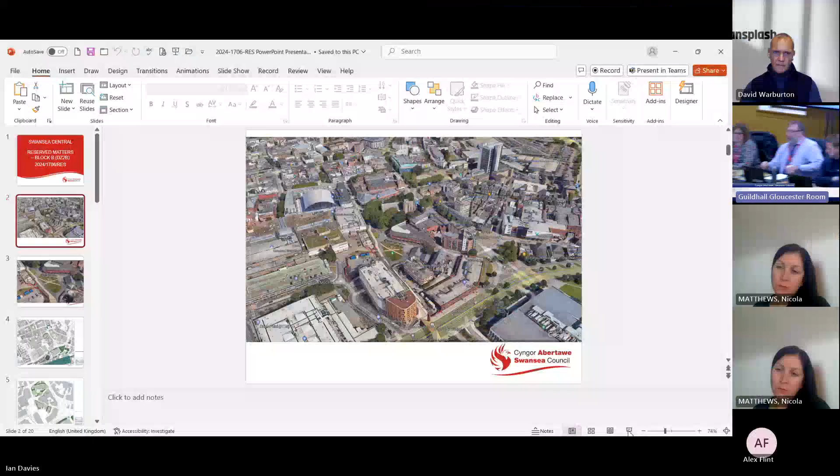Thank you, Chair. Afternoon, members. This is a Reserve Matters application relating to Swansea Central Block B, plot DZ2B as it was originally referred to, comprising a mixed-use building, commercial units with offices, and various public realm improvements, and approval of details pursuant to the outline planning conditions.

The Reserve Matters application was submitted on behalf of the Council and its joint venture partner, Urban Splash. It follows on from the Section 73 permission brought to committee in June, where we changed the parameters relating to the land use for Block B from residential to offices, and also changed the maximum height parameter from 22 metres to 32 metres.

So obviously that's allowed the Reserve Matters to be submitted in accordance with the outline parameters. Essentially, the application seeks Reserve Matters approval for access, appearance, landscaping, layout and scale - basically ground floor commercial use with offices on the upper 4 floors. It's a 5-storey building with ground floor commercial and levels 1 to 4 for office use.

As you can see on the first slide, the application site is the grass triangular area in the middle of the site, bounded by St David's Church. You've got St Mary's Church to the top, the old part of St David's to the east, and to the west the multi-storey car park which is coming to completion. There's a residential block, the bridge to the south, and the quadrant to the west. Next slide please, Ian.

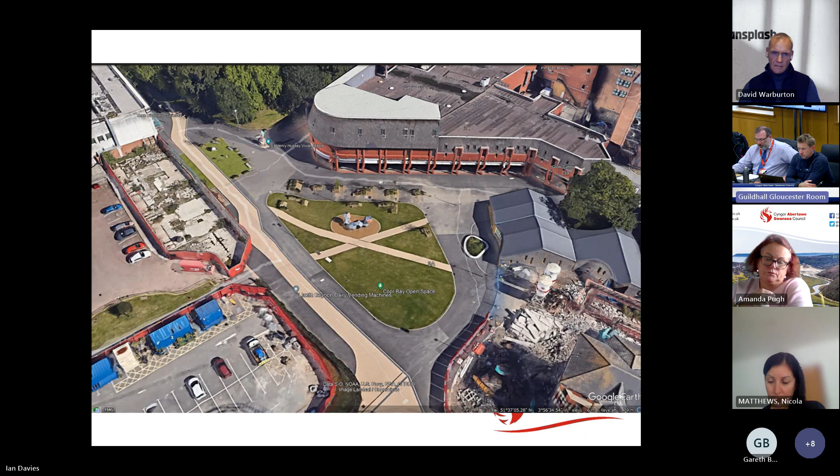So obviously, the shape of the plot is dictated by the site. If you go to the next slide, you can see the red line area and the triangular plot in the middle of it. So it's bang set central in the Swansea Central development. This is the next phase of development following on from the arena, the coastal park, the bridge, and the multi-story car park.

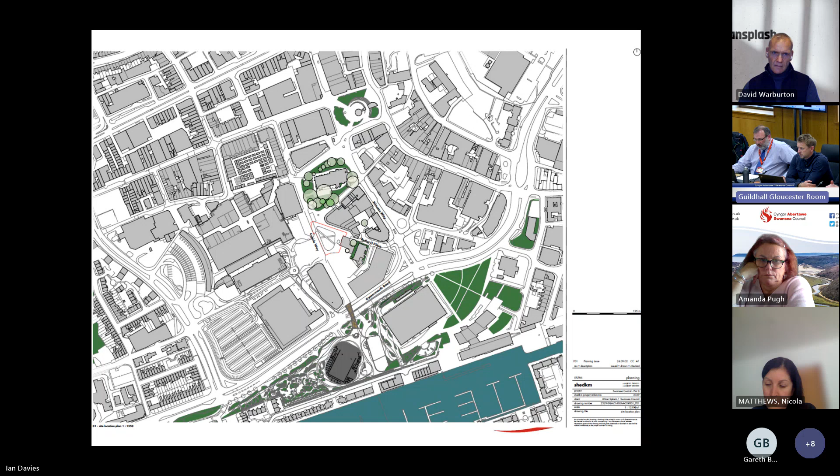So this takes you into some slightly more detail, which shows the footprint of the building. As you can see, it's a triangle block with various public realm improvements around the block.

So the building is designed with a high level of sustainability. It's designed to meet British Council for Offices BCO requirements throughout, providing space requirements to maximize efficiencies while seeking to achieve good standards of well-being, levels of daylight, sunlight, generous floor-to-ceiling heights, and multi-tenant flexibility. It will also seek to deliver an excellent BREEAM standard of accommodation, and aim to meet the London Energy Transformation Initiative, also referred to as the LETI standard for commercial offices, to help meet zero carbon targets.

The scheme has been subject to detailed plans and discussion between the plan officers, placemaking officers at the council, regen officers, council leadership, as well as the design commission, and was also subject to pre-application consultation, which is summarised within the report.

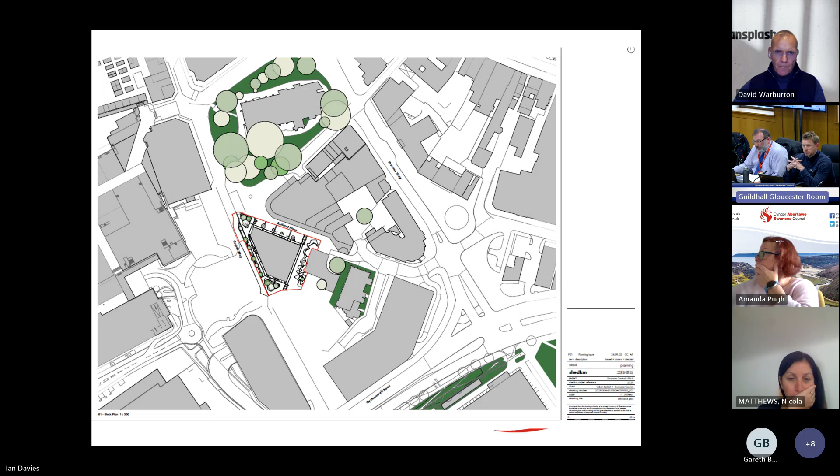As I say, for reserve matters applications, the principle of development is established, but I won't reiterate the policy position — we'll go through the design requirements. Next slide, please, Ian.

So you can see the triangle plot, this is the ground floor. The turquoise green area is basically the commercial element, potentially subdivided into 2 units. The blue area is the entrance, which is basically opposite the church hall. The orangey bit is the back of house, and the white bits are basically the plant, refuse storage, bike storage, etc.

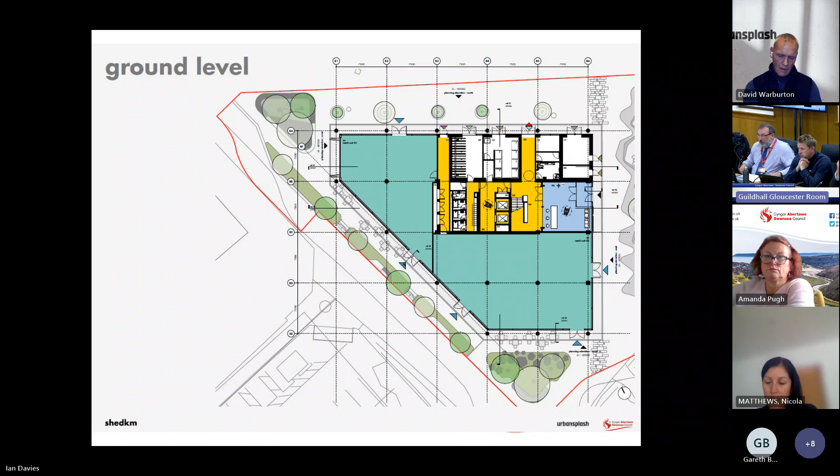So it'll be a single access point through the blue area for the offices above. The commercial units will have their own entrances, and you can see the public realm outside, which allows for, if it's for example food and drink, cafe, restaurant type uses, external seating as well.

So there you can see a potential layout. You've got 2 units there, the blue and the pink, and you can see potential tenant arrangements relating to the internal layout. It's been tested to allow for back of house requirements and seating, and you can see the outside seating as well.

Proposals have been developed in line with the outline consented master plan parameter requirements. Zone DZ2B allocates a maximum height of 32 meters, so it's been designed with a plant height of 32 meters with a parapet height of 28.65 meters. Both are in line with the consented outline master plan parameters, and the scale and footprint are also in accordance with the parameters.

So it's been designed with a proposed wedge triangular shaped building footprint due to the master plan layout effectively, and the designers responded accordingly to this development.

So it's designed to be fully accessible, to provide a flexible building suited to the needs of future tenants, with a single point of entrance up to the upper floors. You've got cycle parking on the ground floor of the building. Use of cycles as a mobility aid is acknowledged and will be accommodated. Some cycle racks will be designed to accommodate trikes, with flexible arrangements based on need, and potential for EV charging points for bikes, mobility scooters, and electrical scooters as well.

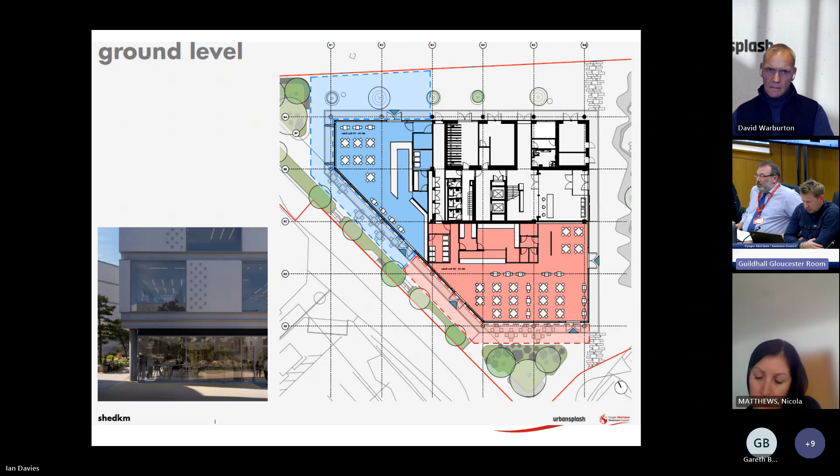Next slide, please, Ian. So that's a typical floor plan of the upper floors, 1 to 4, essentially the same. The blue area is the open plan office space, and you've got the central core area, which is the orangey color — that's the toilets and staircase etc — and that replicates itself on the 4 floors.

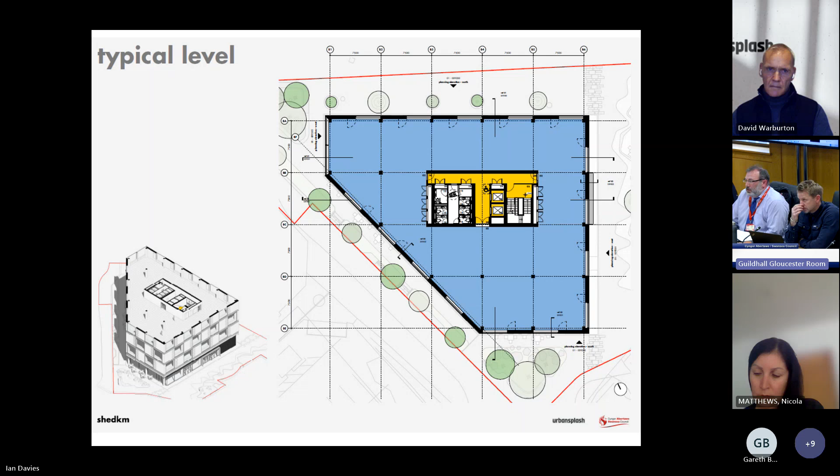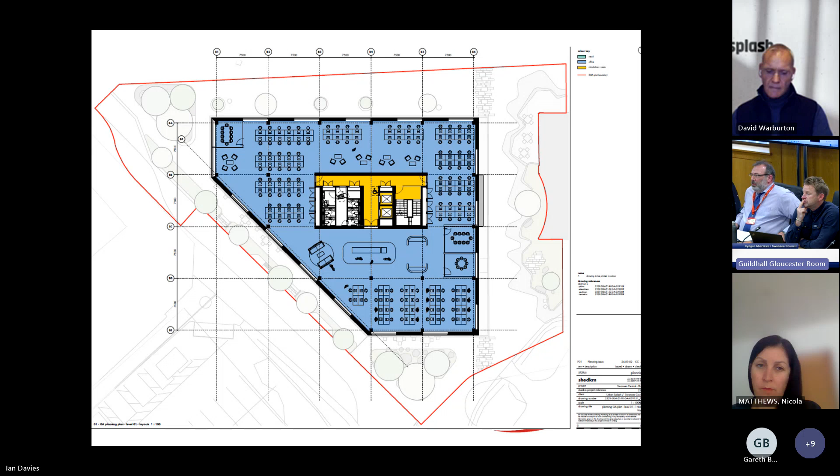So there we go, that's the plant. You can see the orangey bit is the plant. You can just see the PV in the next slide as well, please.

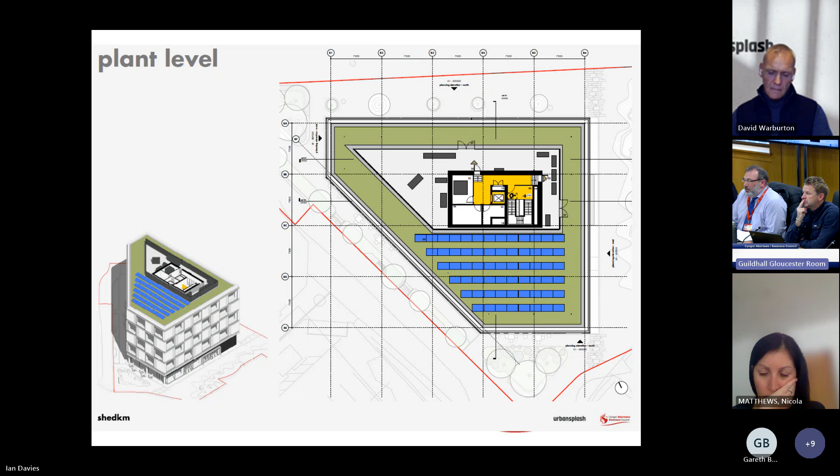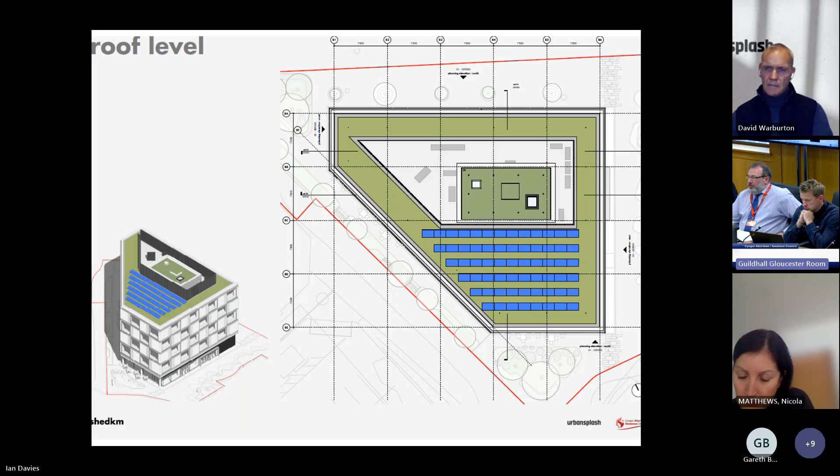So the roof level, you can see the PVs, and the green areas are the green infrastructure, blue-green arrangement, which is important for green infrastructure, meets the SAB standard, and there's a sedum roof as well. The PVs will help make the building as zero carbon as possible in terms of renewable energy.

So this starts to show the detail of the external facade. You can just about see some of the detail. You've got shop fronts at the ground floor, which would be fully glazed, and then a mix of perforated cladding panels and full glazing panels.

You'll have the slender louvered facades, which will hide mechanical ventilation behind the facade. You've got quite a pale cladding, which won't clash with the surrounding red brick and stone of the historic assets, St David's Church and St Mary's Church as well. And then you've got expansive floor to ceiling heights.

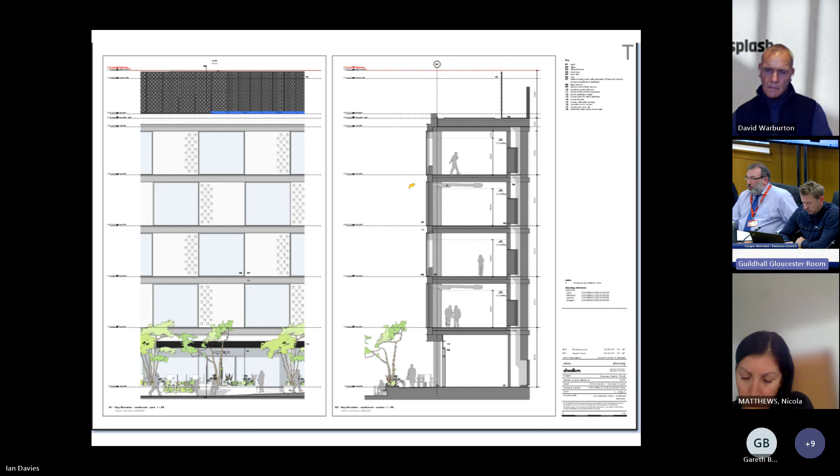So if we go on to the next slides - we've got a number of CGIs which will take you through a number of different angles to view.

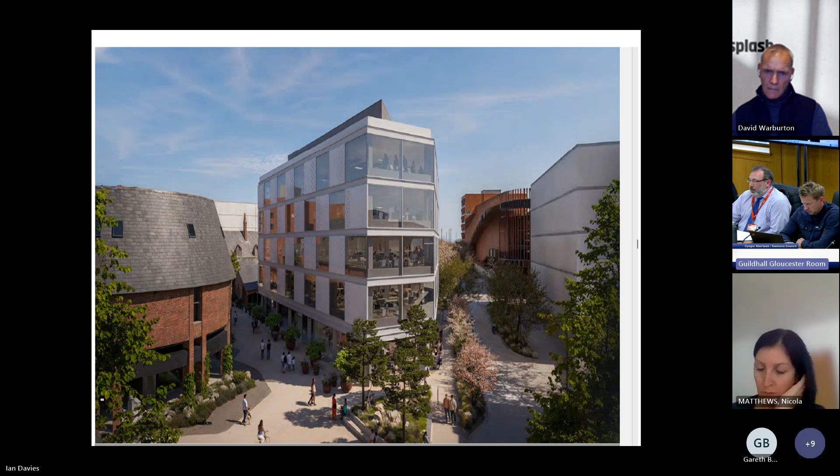This one is looking south towards the bridge. You've got the old St David's building on the left - you can just see the triangle, which gives you an idea of the triangular shape of the building. And the future development on the right, you can start to see the development on the coastal park, the green infrastructure, ground floor, lots of public realm improvements, and the idea of the perforated cladding interspaced with the glazing elements.

Next slide please. So yeah, that's from the opposite direction. That's the facade as you walk south-north from the bridge, walking from over the bridge towards St Mary's Square, St Mary's Church. You can just see the shape of the building, and get an idea of the cladding and glazing elements with the breakout space from the commercial space at ground floor.

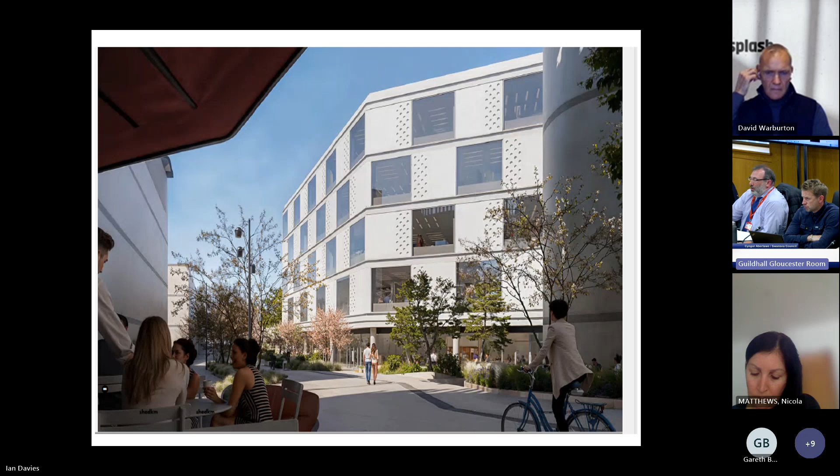Next slide please - again there's some close-ups of the ground floor, the entrances, and the building.

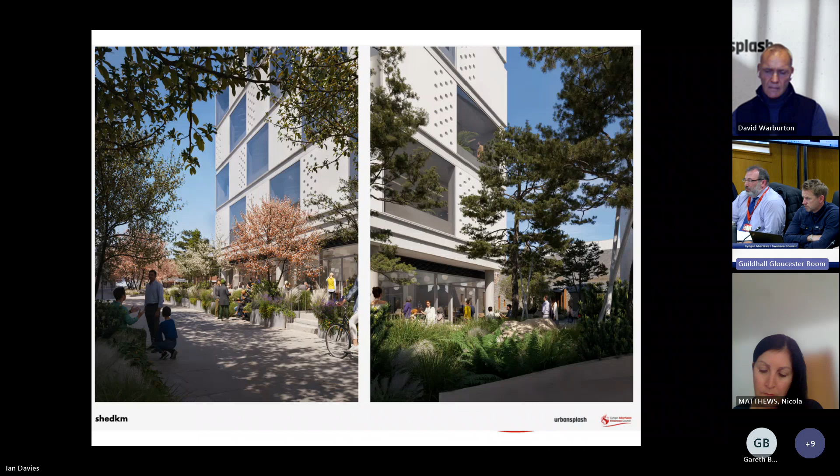Again, you've got different images from different viewpoints, so you can just see the high-quality design elements.

So that gives you a close-up of the shop front. That's the glazing element of one of the units, so it's got active frontage at ground floor, and it would suit itself to some kind of cafe, food and beverage type usage.

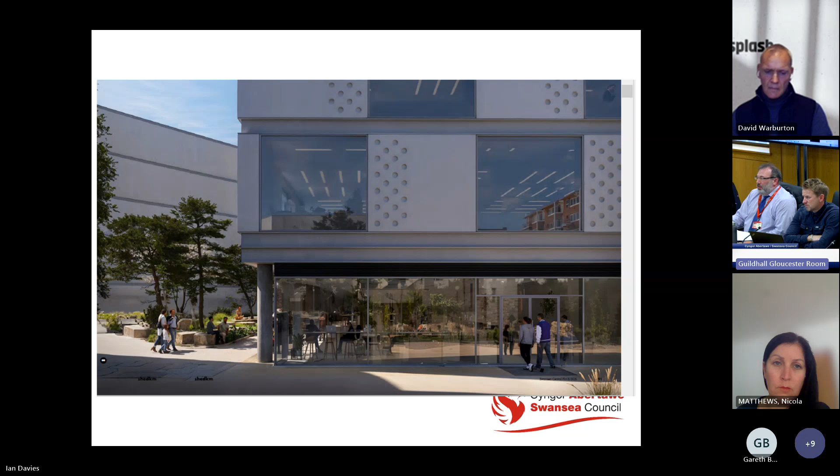Next slide please. Then it shows you from a different angle - you can just see the statue in the foreground of Henry Vivian.

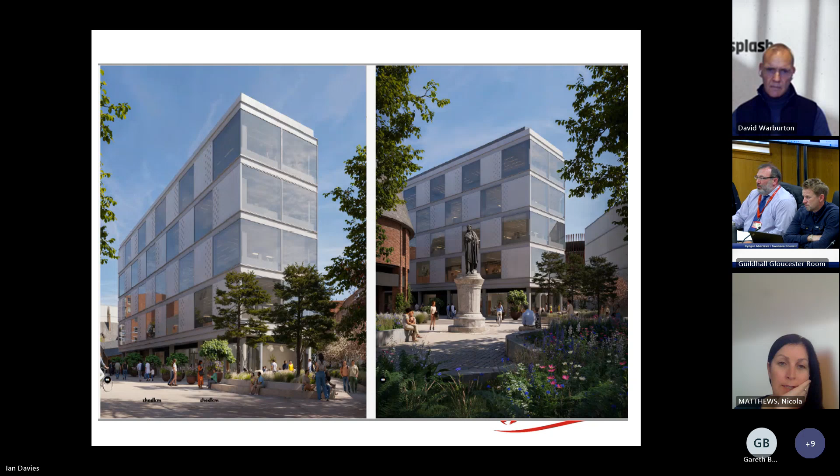I think this is the last one, so I put up the slides. This is the landscaping effectively, picking up the landscape and green infrastructure on the roof, and the extent of the green infrastructure of the public realm and its relationship to the north-south link walking from the bridge northwards up towards the quadrant and St Mary's Church. So it's the entrance, opposite the church hall as they say, and you've got the sort of back of house on the Rutland Place elevation.

So it's a high quality building, good quality of landscaping. Public realm will go towards meeting our SUDS standards, and adherence to the council's green space factors tool as well. Lots of the compliance with outline planning conditions are outlined in the report - I'm not going to go through those. Just to add, there are further conditions recommended regarding external finishes, samples, building details, delivery management plan, the actual planting details of the landscaping, and the ecological measures. So it is recommended for approval with those additional conditions.

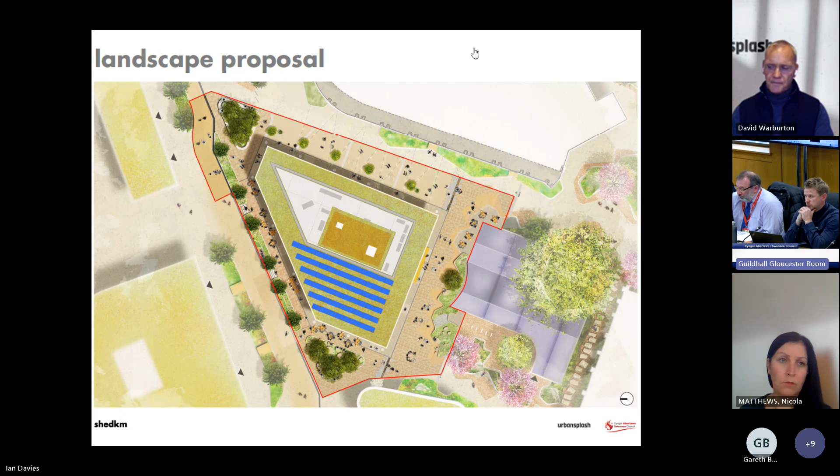Alright. Alex, right? Yeah, so who wants to go first? Shall I go first, Chair?

Thank you, Chair. So if I just introduce myself, I'm David Warburton, Urban Splash's lead director for Swansea. I'd like to thank you for the opportunity to introduce the planning application today, which is the first phase of the Swansea Central scheme, a truly core component in our wider regeneration plans for Swansea.

Urban Splash continues to feel immensely privileged to be working in such a great city, delivering buildings and places of the highest design quality with great environmental and sustainability credentials. This new city centre hub building will help us forward plans across the Swansea Central project and the broader St David's area, and continue the great work the council has already done transforming the city.

And with that, Chair, if I may hand over to our lead architect, our lead designer for the hub building, Alex Flint.

Thank you, David, that's very helpful. My name is Alex Flint, I'm a director at ShedKM Architects, based in Liverpool and London. Thank you very much for the opportunity to present today. I thought it was worth having a bit of narrative from ourselves as the architects - it's quite helpful to have the architect in the room sometimes to answer questions.

As we've said, Plot B will be a gateway to the Swansea Central Development Master Plan. There's been extensive work done analysing that area, and consultation we've undertaken over the last year with the local community, the DCFW, the local council and various other parties to get to what we feel is a suitable design for this site, taking on board the various opinions and recommendations we've been given.

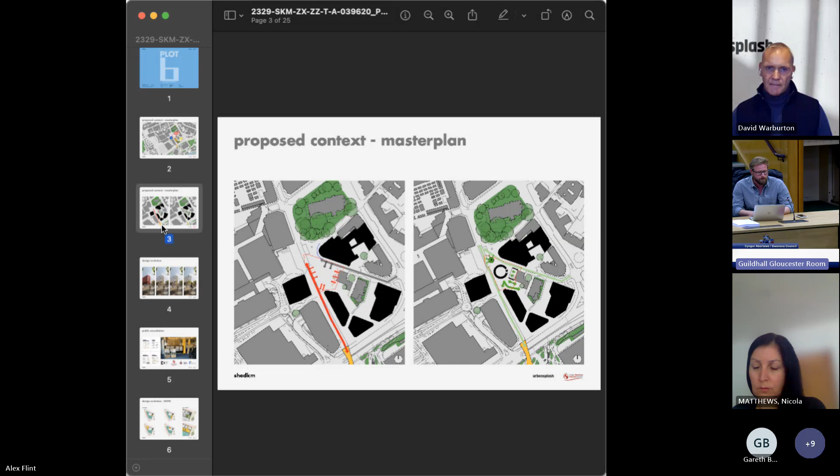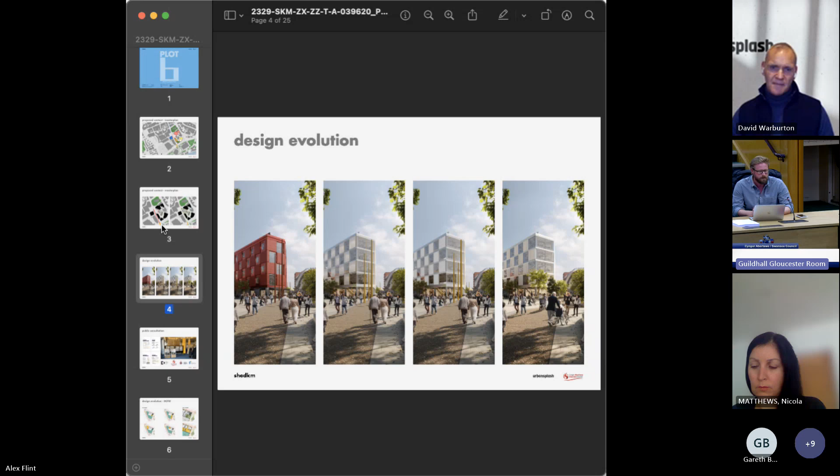On the slides, much of which you've seen already, you can see how the building has vastly developed from where it originally started - quite a solid red building, which was taken quite harshly - but then moved forward to something much brighter, lighter, more modern and sophisticated.

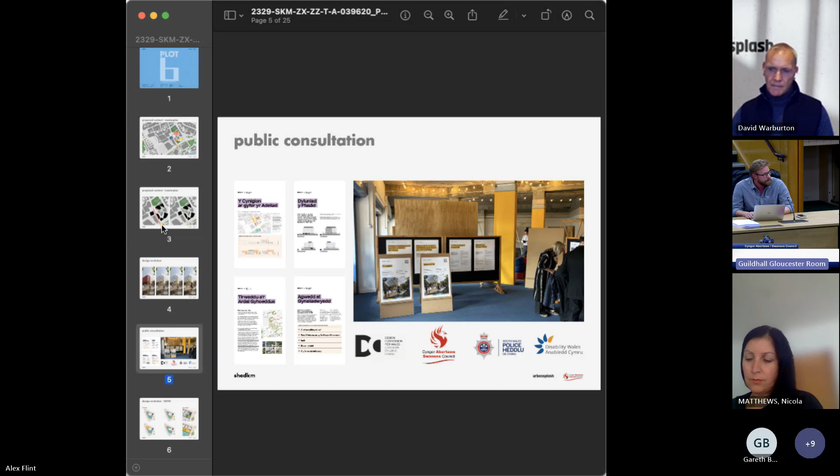There's been a great deal of public consultation, and we went through an extensive process with the DCFW, whereby they made several recommendations, all taken into account in the design. Considerable changes were made from the original design to what's presented today, including the main entrance location, the central circulation core, the active frontages, and the architectural style. The DCFW went on to say they thought the building was very sophisticated and elegant after we'd been through that process of change, getting their support as part of that design development.

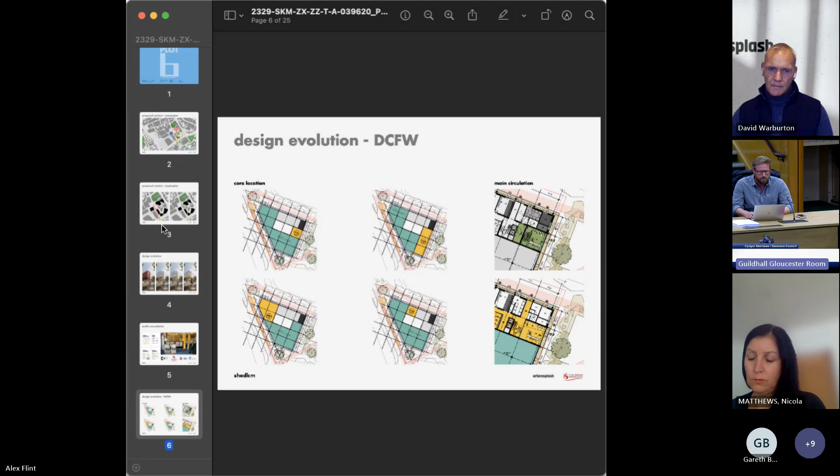Moving on, and again we've seen these plans from David's presentation, but we have really tried to do a 360-degree building here - really active frontages, with 80% of the ground floor being active frontage: glazing, office entrance, employment use, F&B, etc., trying to provide sustainable future value to the area and this gateway site along Cupid Way.

We do feel office buildings often have to have back of house areas, but we try to reduce these as much as possible, and where there are things like cycle stores, they have windows to them, so they become active, fully functioning parts of the building.

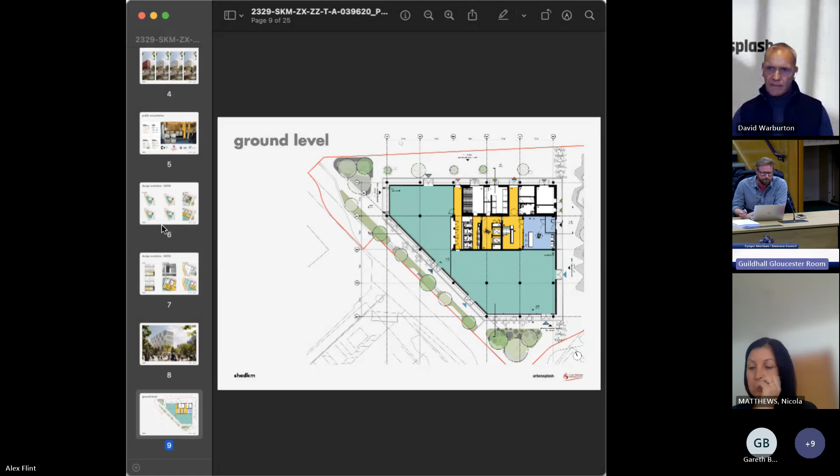For the retail and F&B element that aligns Cupid Way, we've done a lot of research into how they could be set out. We've created bays and back of house areas so we know these will function, and that we'll be able to provide the maximum amount of frontage to Cupid Way without it being impinged by kitchens, extracts, and facilities such as toilets.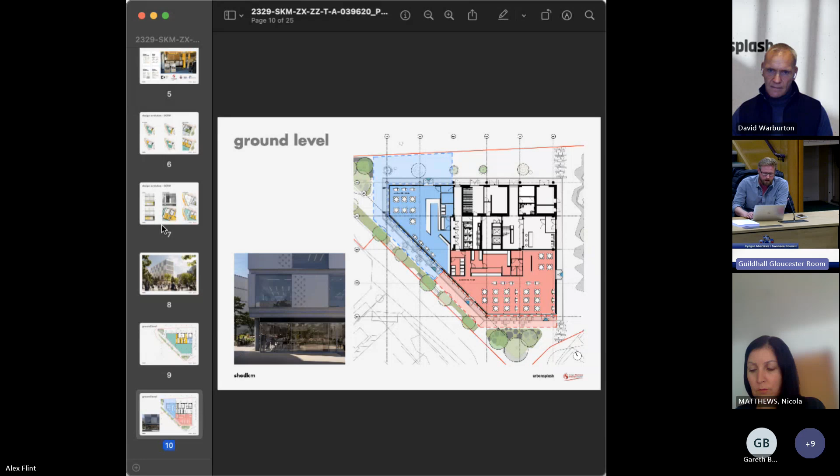It's probably worth talking about the roof, which is a big element of it, and again, as David mentioned, this is a highly sustainable building.

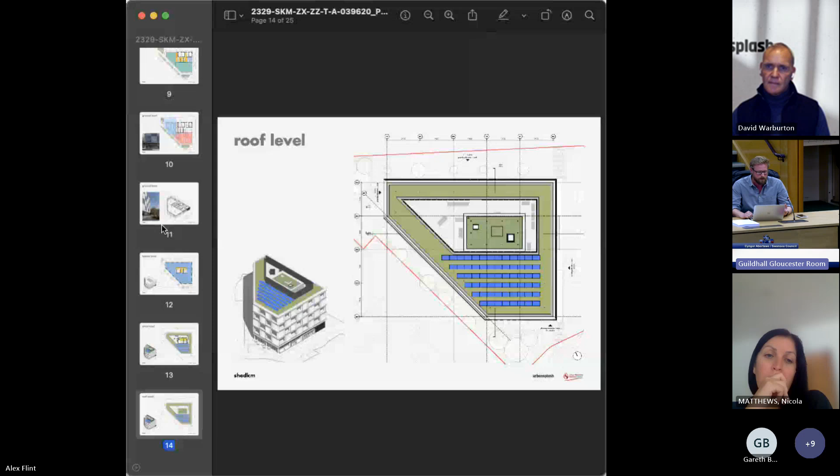The LETI targets, as David mentioned, are a big part of this. The roof will be a blue-green roof, retaining water within it. It will also have an extensive green roof, because it's the only type you can use with this type of blue roof area. That extensive green roof will bring flora and fauna to the area and further habitat to the local vicinity.

That's been coupled with some very sophisticated design elements and architecture, and most importantly, the public realm which surrounds this, creating a very robust route along Cupid Way with robust materials, all discussed and agreed with the local highway team in Swansea, alongside native species of trees and plants, also agreed with the various departments within Swansea's council. So it's taken a lot of people, not just us, to get to this point and create a building we feel is suitable for this site.

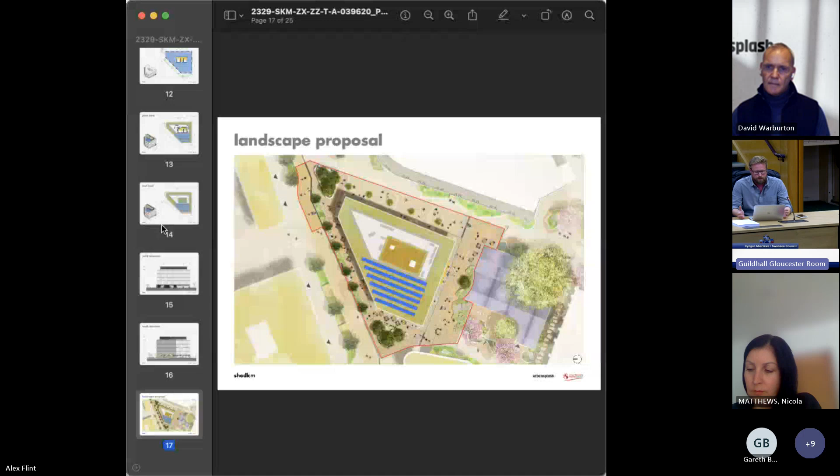We've been through the townscape, so we probably won't dwell on that much more, but we do feel this will be a centrepiece of the regeneration of the Swansea Central Master Plan. It will show continued commitment by the council, by Urban Splash, and by ourselves to delivering high quality buildings and public spaces within Swansea Central. A robust demonstration of sustainable regeneration, we believe, which will encourage new operators and employment in that local area, bringing growth and unlocking future opportunities further afield.

So that's a quick brushed version, but hopefully that's useful, and thank you for listening to me today. Okay, thank you.

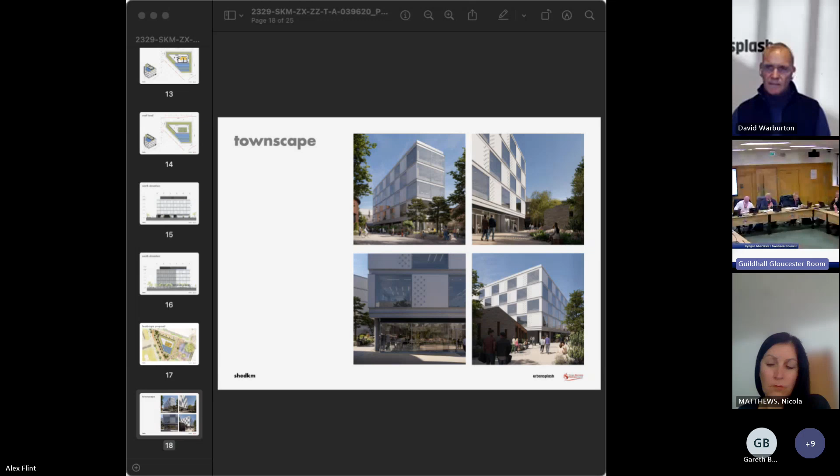Sorry, Councillor Jones. Yeah, thank you, very interesting I have to say. I like the idea of the bee bricks and the Swift bricks, I thought they were very good. But I have a question about the windows.

Much of the report talks about natural light, which I agree with. But considering a lot of the windows are on the south and west, how have you mitigated against the impact on people working in the offices if we get a hot summer? Because the last thing you want is all the blinds down when you've gone to all the trouble of putting all the windows in. So is there some kind of darkened glass there to take away the glare of the sun, and also take away, unfortunately, some of the heat in the summer, not the winter?

That's a very good question. The windows are triple glazed and have a coating to the outer face which prevents glare and overheating. The building is also afforded openable windows. So although openable windows, we were doing those back in the 60s, we've brought those back into office development so that occupiers can open the windows to cool themselves down rather than relying on hermetically sealed boxes with mechanical ventilation. The combination of those two things will stop the overheating, stop the glare, and make a comfortable workspace and environment for people to be in.

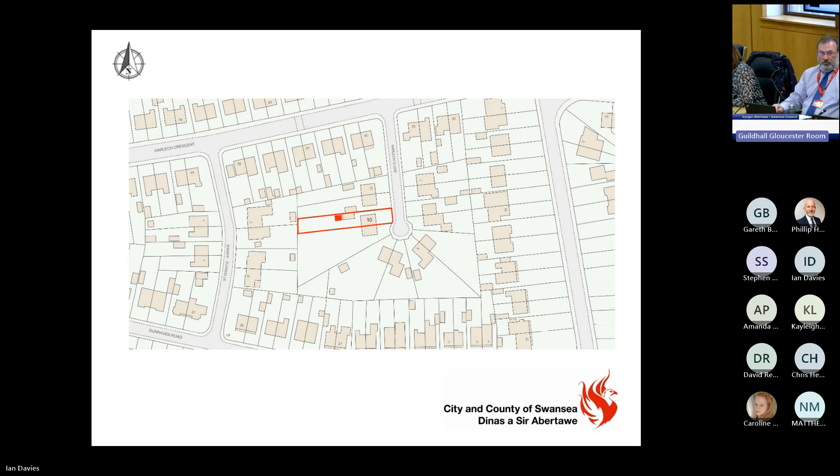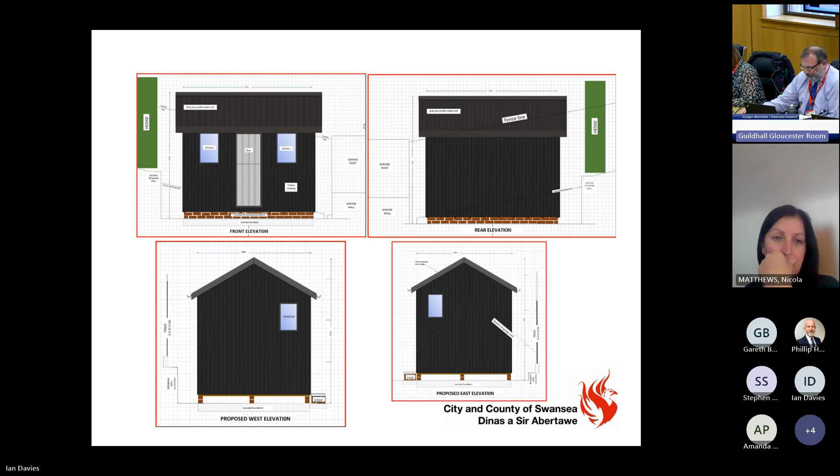Planning permission is sought for the replacement of a detached outbuilding for home office use within the rear garden. The proposed outbuilding is to replace the existing shed and will be single-storey with a traditional pitched roof design, a width of 2.8 metres, a length of 3.7 metres, and a maximum height of 3.5 metres, comprising a door, two front windows and two side windows. The outbuilding will be slightly raised on a concrete brick plinth and finished with grey box profile metal roof and timber cladding walls.

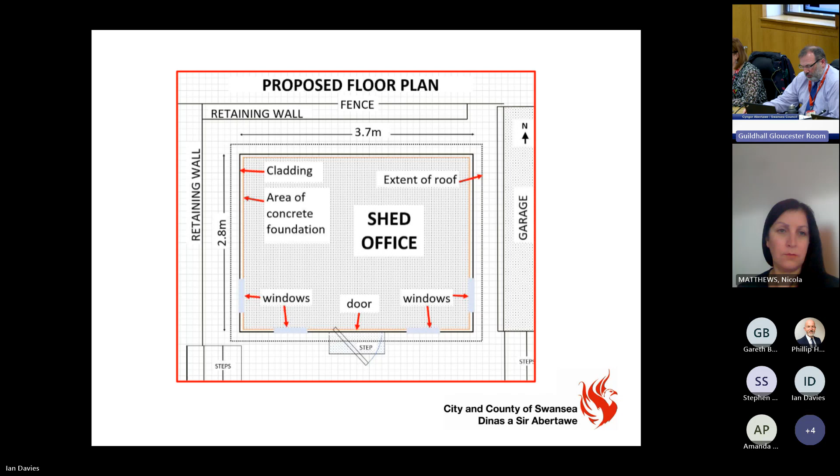Next slide, please, Ian. The submitted floor plan shows that the outbuilding will be used as a home office and shed in connection with the main dwelling house. Next slide, please, Ian.

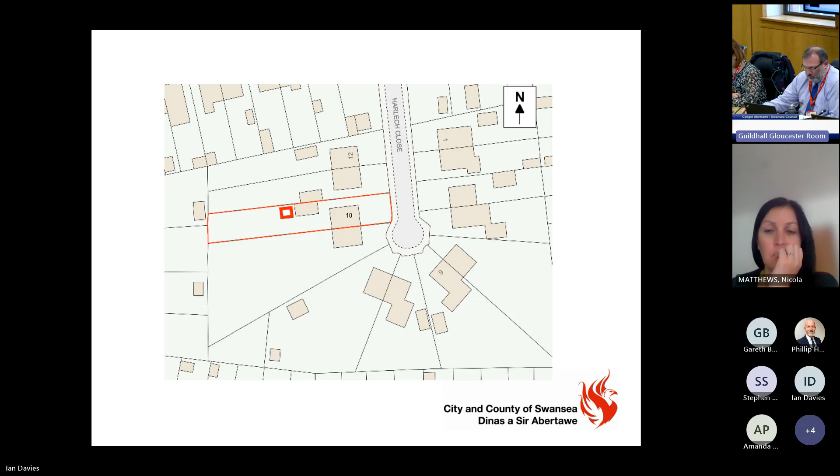This block plan shows that the replacement outbuilding would be located next to the existing garage and positioned approximately 0.6 metres off the existing boundary fence with the neighbouring property, with the rear garden area remaining unaffected by the development.

The main issues to consider in the determination of the application relate to the principle of the development, the impact of the proposed development upon visual and residential amenity, ecology, and highway safety.

In terms of the principle of the use, the proposed outbuilding is to be used as a home office, which is considered incidental to the residential use of the main dwelling house.

In terms of visual amenity, the proposed outbuilding forms a relatively modest single-storey unit in a traditional shed-style form with a pitched roof with windows and a door.

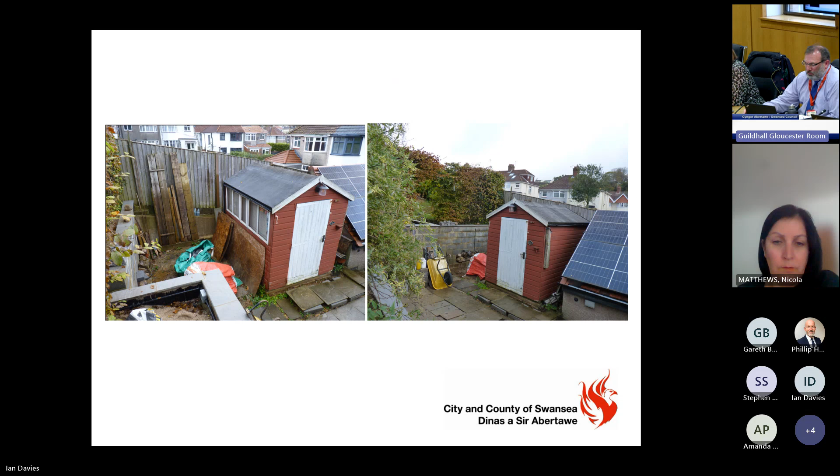The photographs on screen show the existing shed to be removed on site and the location of the proposed replacement outbuilding in relation to the existing garage on site and within the garden.

In terms of residential impact, the adjoining neighbours have been notified of the application, along with a site notice displayed at the address, and no comments or objections have been received to date.

Whilst the scale of the proposal is modest, it is noted that the neighbouring property is at a lower level, and the outbuilding would extend above the existing boundary fence. However, it's not considered this would be significant enough to have an unacceptable overbearing impact.

The local authority's ecology department has been consulted and has raised no objections, subject to standard advisory notes, and a condition will be attached to ensure that the proposed scheme of ecological enhancements is implemented in accordance with agreed details and timeframe.

The proposal is not considered to impact the availability of on-site parking or the demand for spaces, and therefore highway safety is unaffected. In conclusion, having regard to all material planning considerations, the application is recommended for approval, subject to conditions set out in the officer's report within the agenda pack.